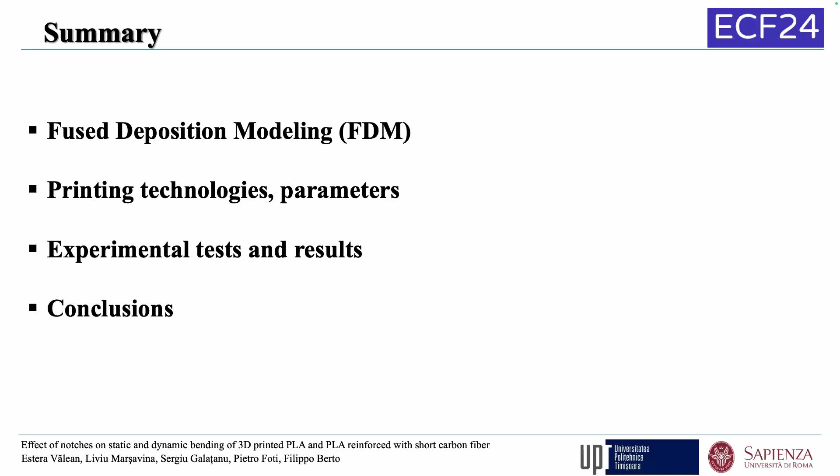So a short summary. I will talk very shortly about fused deposition modeling. I will present our printing technology and the parameters that we use to print our specimens, experimental static and dynamic bending tests, and some conclusions. So, as you know, additive manufacturing is part of Industry 4.0. Talking about polymeric materials, we have different techniques which use different states of the material.

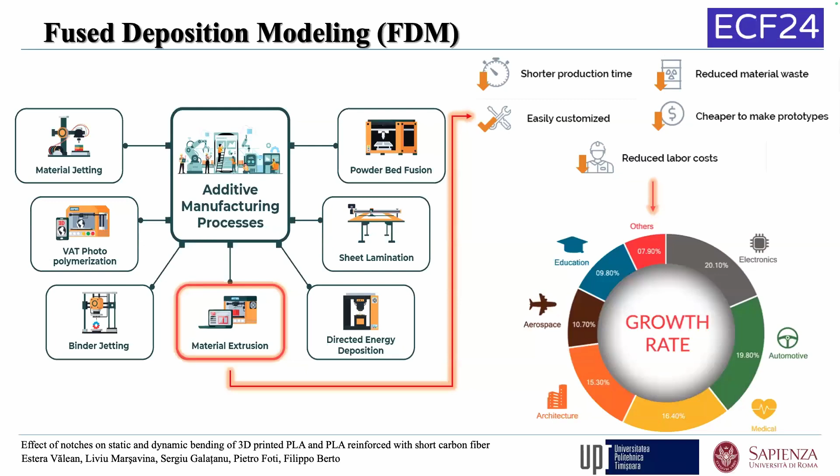The first presentation in this session was about material jetting. The material was in a liquid form, the same as in photopolymerization. So we use material extrusion, which is probably one of the easiest to control and to customize additive manufacturing techniques for polymeric materials, which reduces labor cost, reduces material waste, and has a quite shorter production time. Nowadays, this technique is used more and more in different industries.

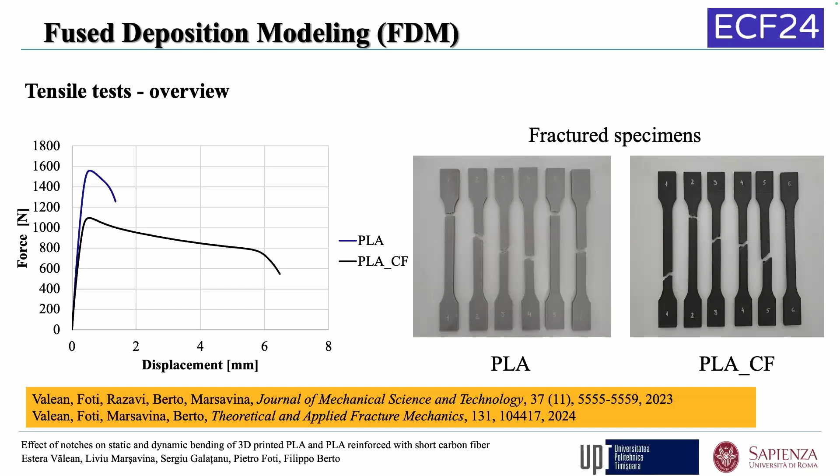So up to now, there are some studies published regarding the tensile results on PLA and PLA reinforced with carbon fiber. So we did some tensile tests, and what we get, higher strength, but also higher tensile modulus of the PLA compared with PLA reinforced with carbon fiber. I was looking in the literature, and there are other authors who get the same results.

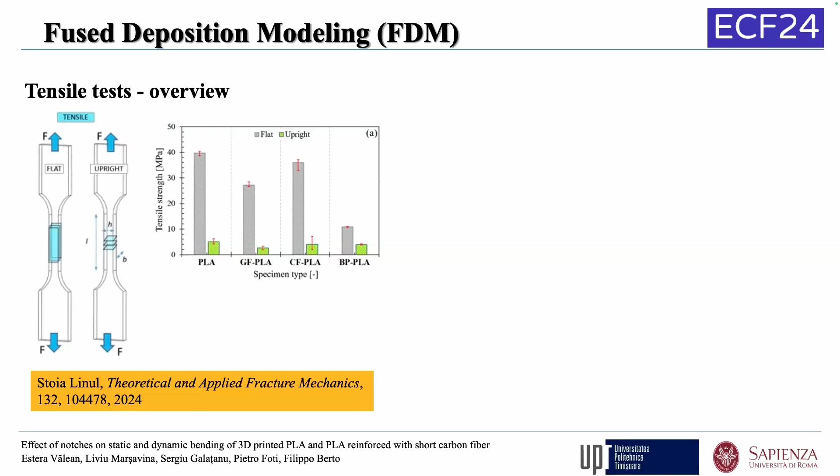So on tensile strength tests, some of my colleagues from Timișoara investigated PLA reinforced with glass fiber, with carbon fiber, and with bronze particles. And the maximum tensile strength was also obtained for the PLA. And also there is a recent study in press from some researchers from India. They studied PLA, ABS, and nylon reinforced with carbon fibers, and they get higher tensile strength for unreinforced PLA, also flexural strength, but they get higher tensile modulus and higher flexural modulus for their tests.

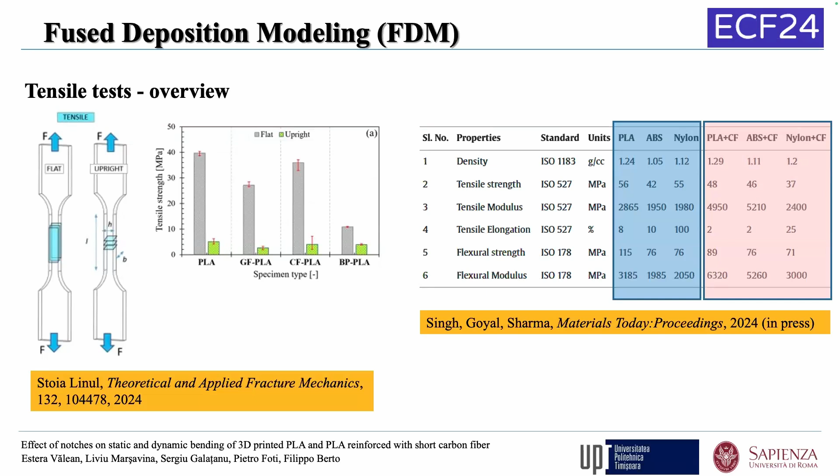So we use a commercial 3D printer made by a Czech producer, a Prusa printer. PLA and PLA reinforced with carbon fibers, less than 20%. The medium diameter of the fibers was between 10 and 15 microns, and their length was around 250 microns. We print because we want to do impact tests. We chose the shape of the specimen according to ISO 179, which is the instrumented impact recommendation.

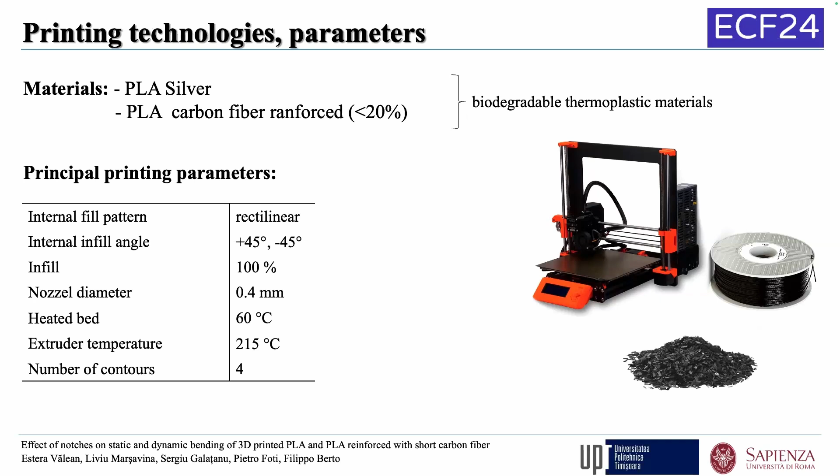So we use rectilinear pattern, plus minus 45 degrees infill angle, 100% infill, nozzle diameter 0.4. The heated bed was at 60 degrees Celsius, and the extruder temperature 215 Celsius. And we use some contours around the edges of the specimen.

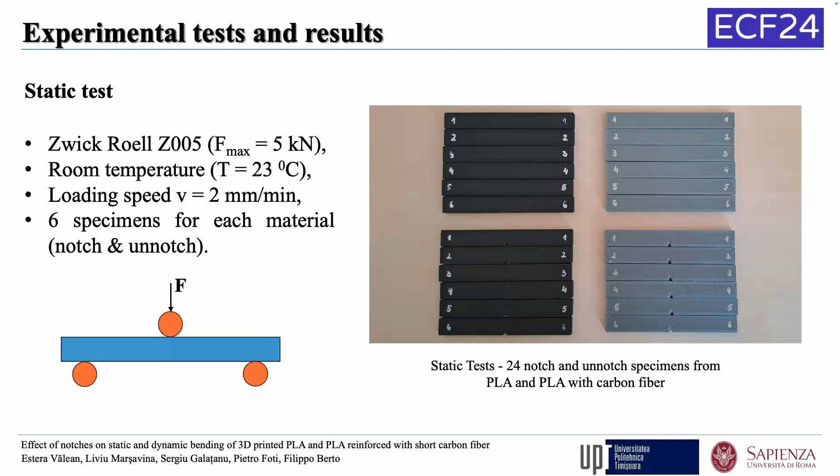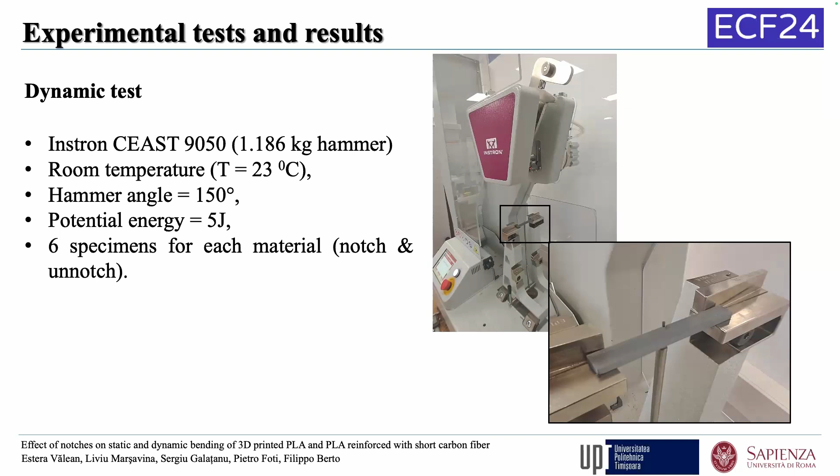So the static tests, we did them in our lab using a Zwick Roell universal testing machine at room temperature with a loading speed of 2 millimeters per minute, and we use 6 specimens, notched and unnotched, for each type of material. For the dynamic test, we use an instrumented impact hammer, which is also in our lab. We did the test at room temperature. The potential energy of the hammer is 5 joules. And the initial angle for calculating the potential energy was 150 degrees. Also, 6 specimens for each material, notched and unnotched.

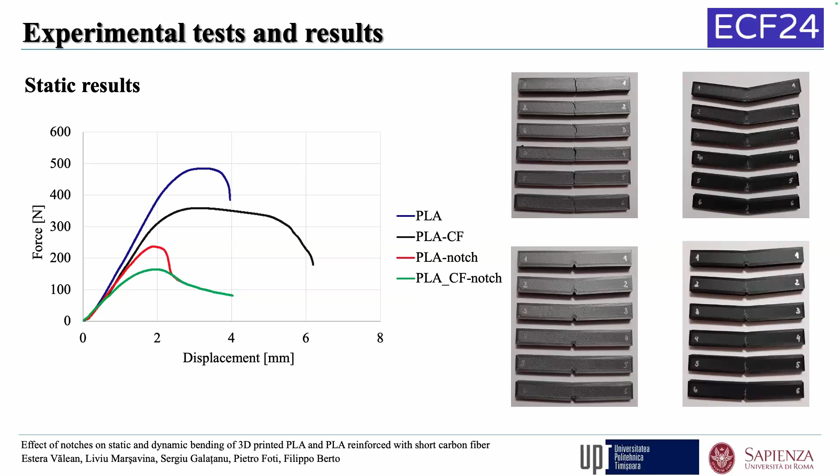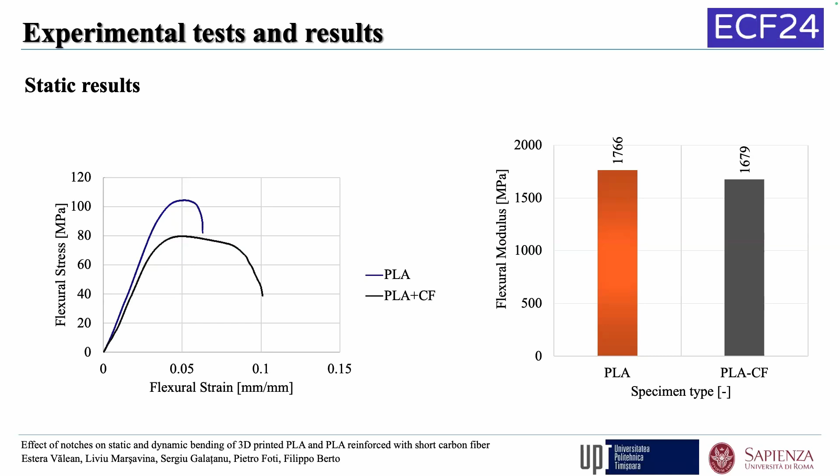So some results for the static test: we got the same results as in the case of the tensile test. The higher strength was obtained for the PLA compared with PLA reinforced. The only property which is higher for the reinforced PLA is the energy of fracture, the area under the curve, which is higher in both unnotched and notched specimens. So we determined the flexural modulus. There are not such big differences: around 1.76 gigapascal for PLA and 1.68 gigapascal for PLA reinforced with carbon fiber.

We determined the stress at break, the flexural strength, for all the materials. So the highest value, as you can see, more than 105 megapascal, is for the PLA, and then we have the value for the PLA reinforced with carbon fiber, which is around 80. The energy absorption is the only property that is higher for the reinforced specimens, for both notched and unnotched specimens.

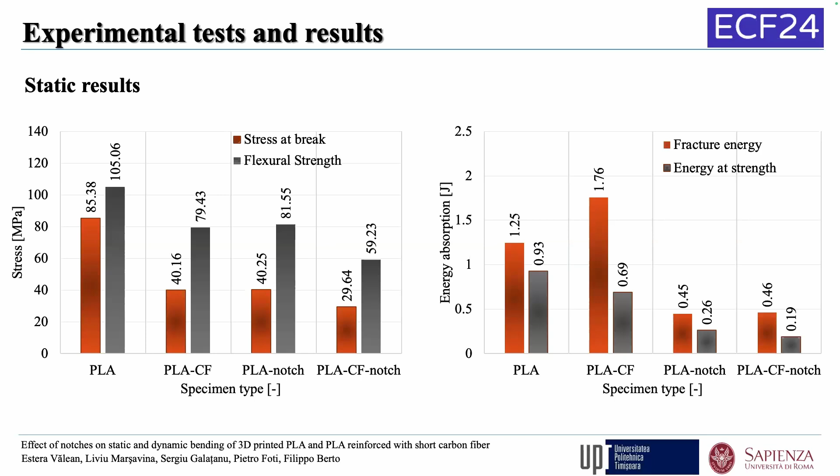So we tried to estimate the fracture toughness on this static test. So I did a calibration of this specimen because this is not according to the ASTM standard for fracture toughness of polymeric materials. So we did a very simple finite element analysis. And for this ratio between crack length and width of the specimens, which was 0.2, we get a non-dimensional geometry factor of 7.09. And I compared with our other results, the fracture toughness determined according to the ASTM standard. So we get quite similar results. For the PLA reinforced with carbon fiber, almost the same results. And for the other, a little bit higher values, but not so much.

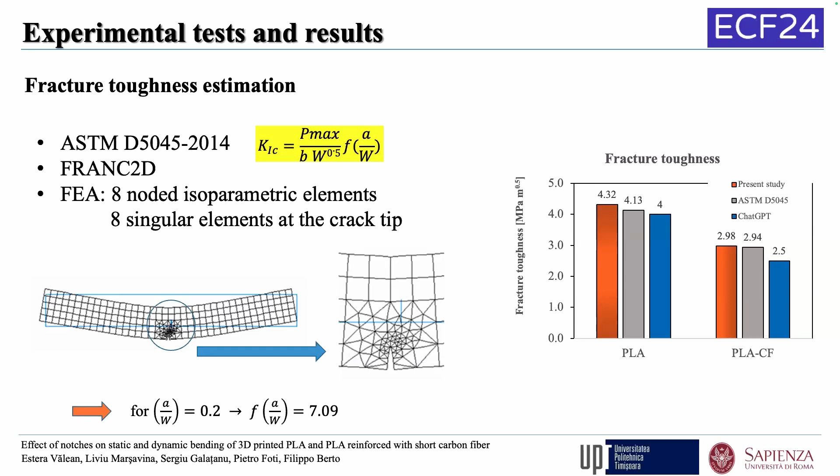So inspired by the presentation yesterday of Francesco Iacoviello, I would like to check what ChatGPT gives for these materials. And you can see, asking for the fracture toughness of simple PLA, I got 2 megapascal square root meter. Defining more, PLA 100% infill and with contours, the result of ChatGPT is 4 megapascal square root meter, quite close to what we get experimentally. Also for the reinforced material it gave us 2.5 and the test result is 2.9. I don't know, maybe in future the predictions will be better. However, in my opinion, we should stick to performing tests.

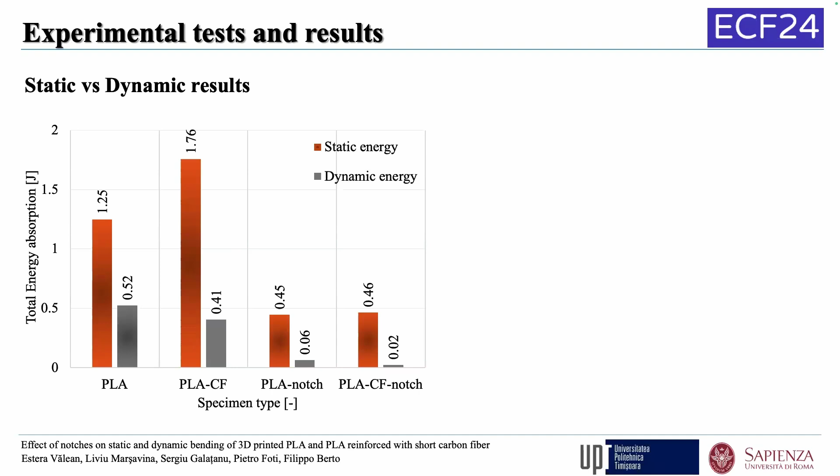So to conclude, the only improvement that we obtained by adding the carbon fiber was for the fracture energy, which was higher in static tests, not in dynamic tests.